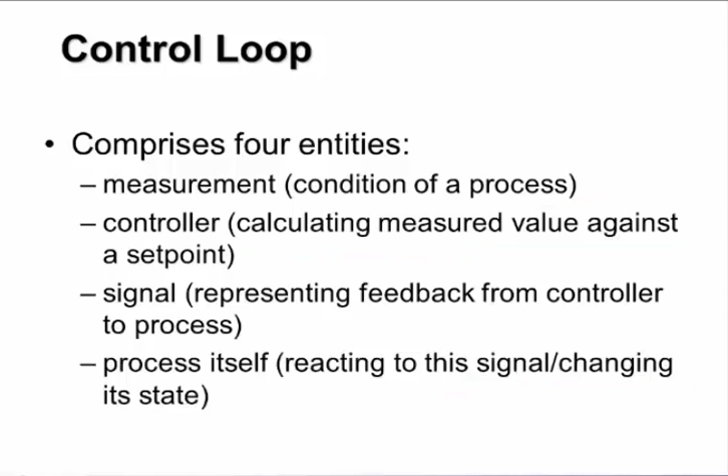The processes themselves can be actually described in various terms, and can also be defined as either a steady state model and a transient model, or an intermediate model. So what I mean by that is that the steady state model occurs over time on how the system will react over a long period of time.

Now, for a short period of time, really defined as the difference when a system actually changes its requirements. In other words, you change the set point or change the output, and the system has to react to it, and it's that reaction which refers to the dynamic response.

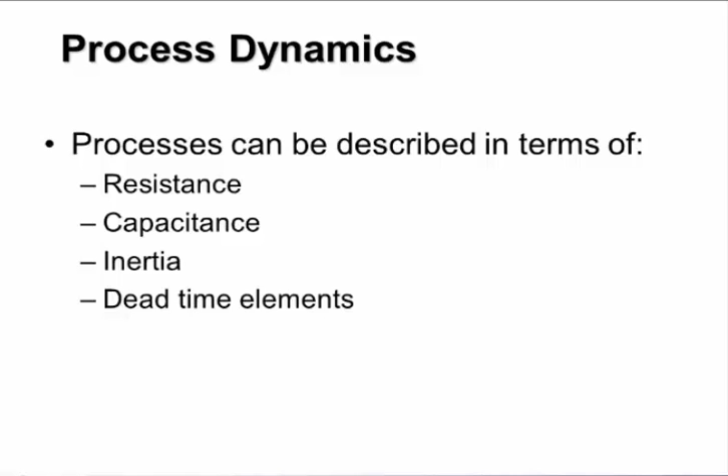Which then brings in the typical processes that you see here. So whether the system has purely resistive linear characteristics, whether it has a second order inductive or capacitive characteristic, if it has inertia, whether it be mechanical, thermal, chemical, or process inertia. There are also specific cases where dead time is a specific point that can be measured very clearly, but it points to a very specific case of delay in reaction based upon an impetus.

Okay, so for a resistive type of process, it's important to note that yes, there will be a response, and the characteristics that you see here is referred to as a step change. But what happens is that the process itself will eventually come up to speed, but it means that the system does have a very linear relationship from the change of output to the change of the process, and that is why it's referred to as a resistance.

In other words, for a small change of output, in other words small change of a valve, then you will get a change of the process, such as a flow system.

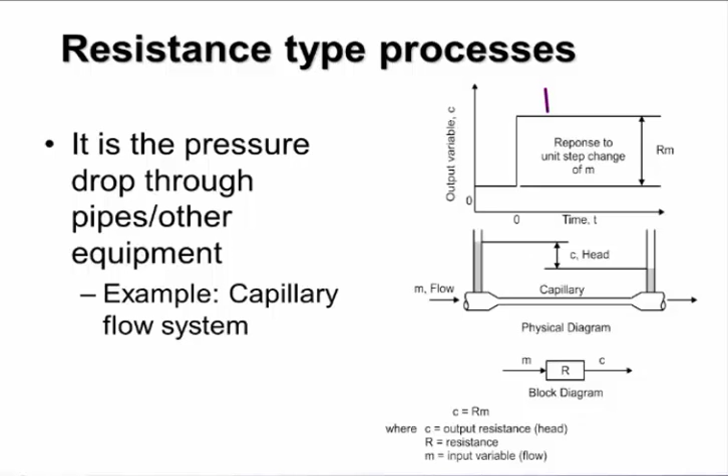Okay, so the capacitive type is where it has a characteristic of the loop that has some internal storage. So it has the ability to store the process, and at a set rate, or at a rate determined by the physical characteristics, respond to that process. But it isn't linear, and that's the characteristic.

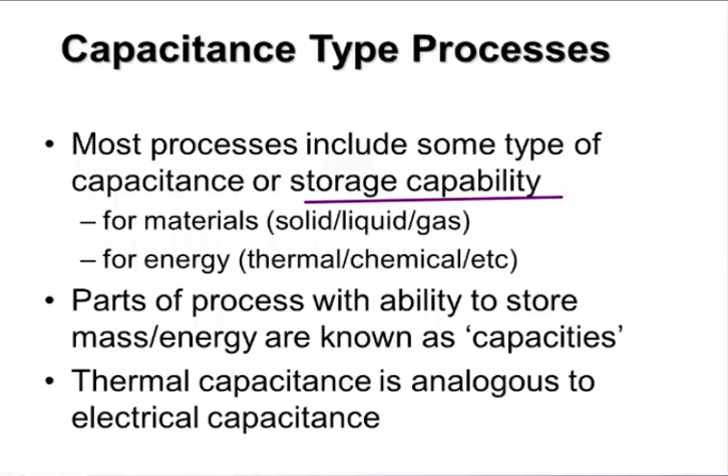So you see this particular type of aspect known through most of the typical processes that you will see around in process industries. Now, for the capacity or the capacitance to be effective, there is the ability to store the energy or store the material. And for storage of material, there are typical things of processes that include solids, liquids or gas, and or energy, which could be thermal energy, chemical energy, or process energy.

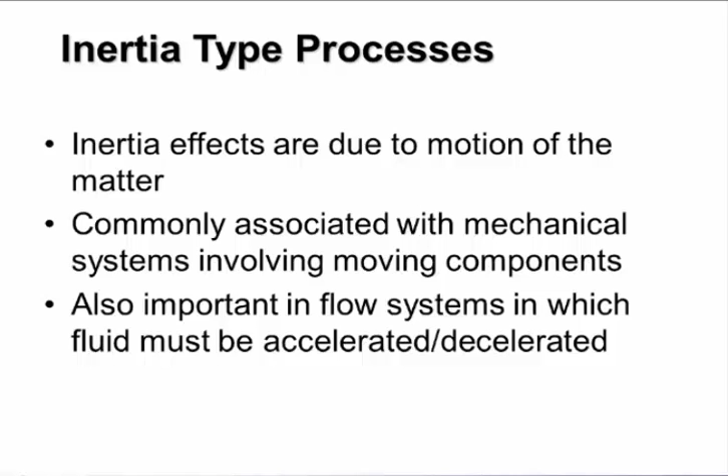So for the inertial type, there is a type of reaction between the impetus, in other words the stimulus, and the reaction, where you will get an inertial flow or inertial resistance initially, and then the system will actually be responding. So there is mathematical modeling of these types of processes, but they usually are around changing or moving of components. So it could be the position of a gantry robot, it could be the inertial movement of a valve, but anyway, there is a resistance to the movement there.

Okay, so of a first order process, a typical one is level control, of which you'll see that you do have flow going into a particular reservoir. The reservoir will directly vary its height, which is what you're trying to view, dependent upon the amount of material coming in. So there's a direct relationship - flow going in will cause an increase, a linear increase in the height. And that's assuming that the cross-sectional area of the process is uniform.

Now, it also has to be taken into account that the outfeed pipe will also affect the level, and it needs to be put into the equation or algorithm, that it also reduces the effect of the in-feed pipe. By saying that, you imply that the level will go down.

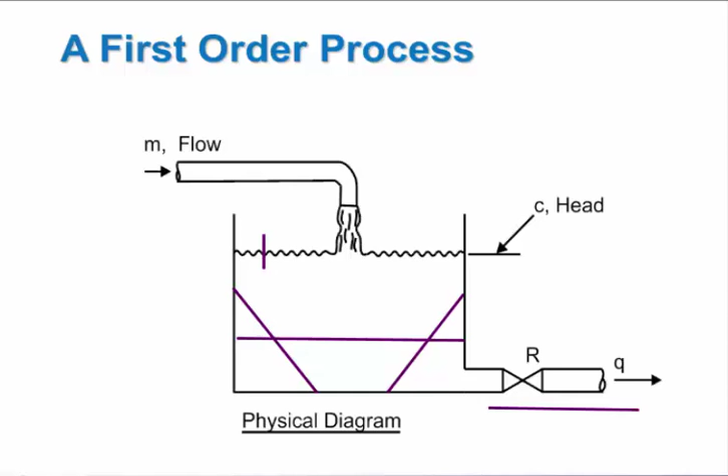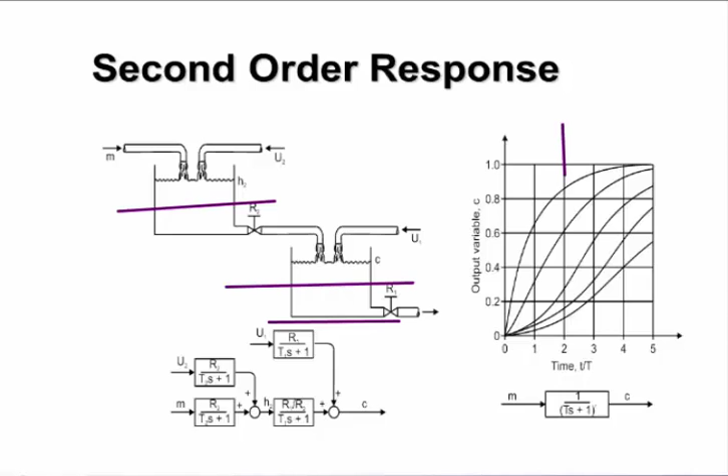So what occurs is that for optimal operations of your machine, you need to adjust the coefficients of your controller to your physical process, and that is referred to as tuning. One of the most prevalent controllers and control loops in industry is what is referred to as feedback.

Now, feedback is basically a system that will take the measurement of the process, as we mentioned before, and that is typically referred to as the PV, or process variable, that is fed into a controller, which calculates the difference between where it has to be, in other words, its set point, from the process variable, and then gives you a calculated value, which is referred to as the error.

That error then has an issue that needs to be resolved. In other words, the whole purpose is the error needs to be minimized, and then there are different coefficients within the system, which are there to make an algorithm very close to the mathematical estimation of the process.

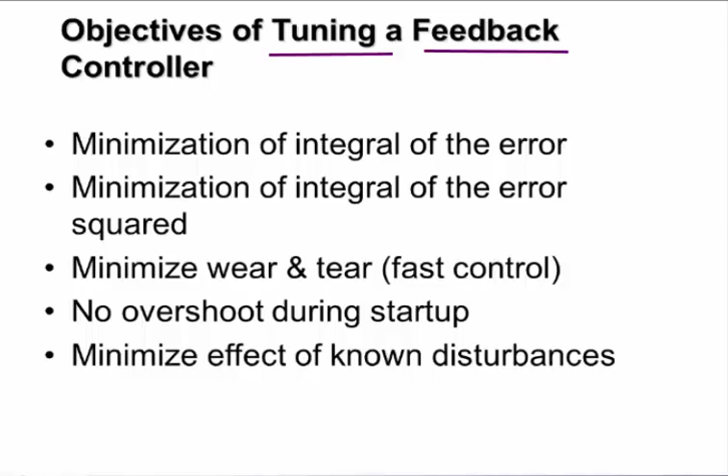So it could be that you have wastage getting up to the desired value, and hence there are various points such as trying to minimize the error of integration, and we'll talk about what that actually means when we look at the graphs.

So the error that you will see is based upon an oscilloscope or trend trace of two particular variables. One is the set point, shown in the dotted line, and the other is the process variable, which is the actual response. You can see here that the set point can change very cleanly and within minimal time.

With zero time, because it is just a virtual change. It's a parameter change. It could be a change in voltage, it could be a change in current, but it occurs without inertia, so immediately it has no physical limitations to it.

It goes straight up to its constant value. Now, what occurs is that drives the process change through the actuator, but it can't physically change immediately like that. So it has to go through a recognized response curve, and that's what we see in dark. The shaded areas are the differences between the two, and the idea of tuning the controller to the process is the minimization of those errors.

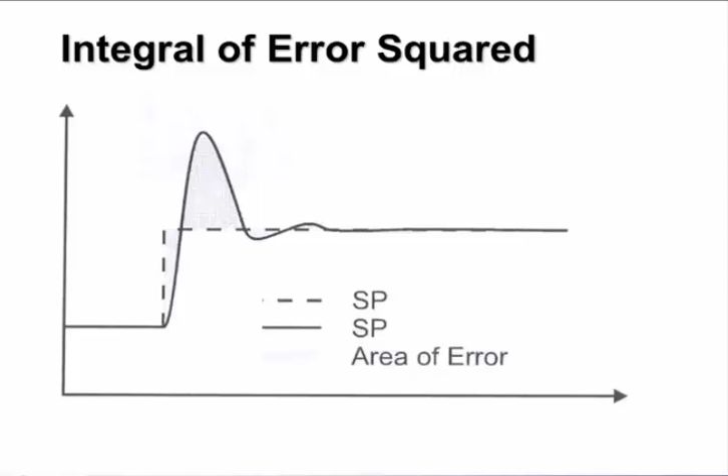So what are the typical types of controller outputs? There are two types of controller outputs. As we mentioned, there would be an error, so we have to change the process somehow, and there are two classical methods on how to change the process. You either put a control that will either fully turn on a variable or fully turn off a variable, and that is referred to as on-off control.

And the variations in the process to that may, depending upon their inertial characteristics, smooth out that modulated wave, that on-off waveform. In other words, referred to as a pulse waveform, and give you a response.

The other type is one that will continually vary the output, which is referred to as modulating control. There are two different types, so what do they actually mean?

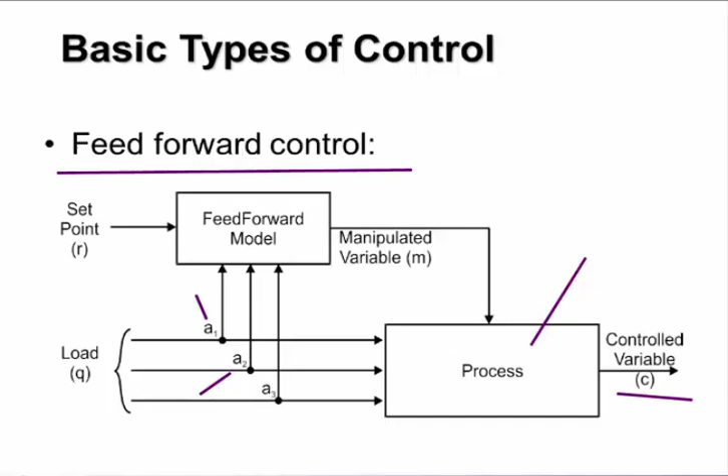So that's the process. It predicts what will go on based upon some very complex and also very sophisticated algorithms. Now, the accuracy of this type of control heavily depends on the accuracy of the model plus the measurement of the variables coming in.

So the other type of system is referred to as the closed loop model, or also referred to as the feedback model. That is the type of process that we've described many times, and is also quite common in most industries, where the process is actually being measured through a measurement device.

So its effect is actually being measured, and hence, if the effect is different to its set point, it makes the controller react and change an output, which will then change the process. So whereas feed forward predicts, feedback reacts.

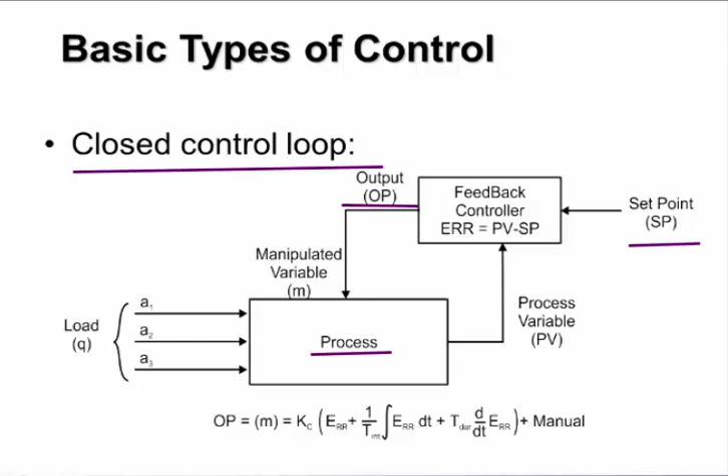And yes, it does have a set of equations or a model that it needs to understand about the process to be able to react effectively, but that is a different set of equations and models compared to the feed forward, because you are firstly changing different timings, but also looking at different inputs. So what are the models within the closed feedback loop?

Well, the three classical algorithms being used are what is referred to as proportional, integral, and derivative control. So what does that mean? The proportional control allows the system to know how over steady state time it will react. In other words, if you place an output, then you know for a certain ratio, referred to as the proportional gain, how the output will respond.

In an integral control, what it says is, okay, if the desired value is never reached, in other words, the error is never zero, then we need to reevaluate it. And that's where the integral control comes in. And the derivative says if the output is changing too much, which causes a response in the process variable too quick, then you have to dampen it down, and that's where the derivative value is in there.

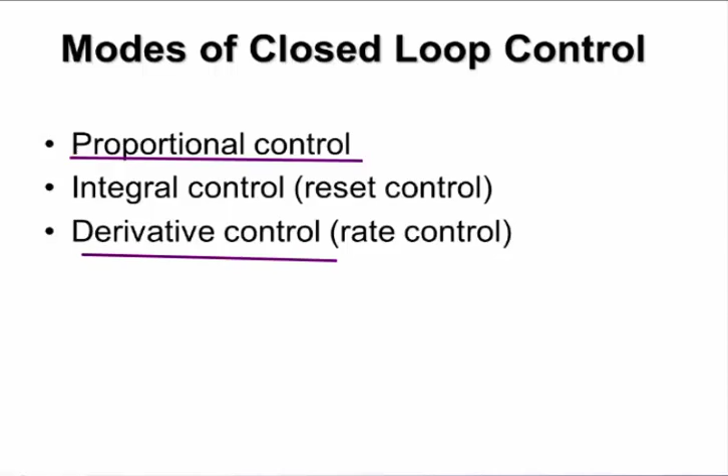So you may have heard of PID, and that's exactly what we are doing. It works off a black box reactive model, and that's what most processes are suited to. Okay. So they can work independently or in combination, but the idea is that you need at least proportional change to take the steady state value to the correct value. And you can also throw a combination of integral and derivative into the particular system,

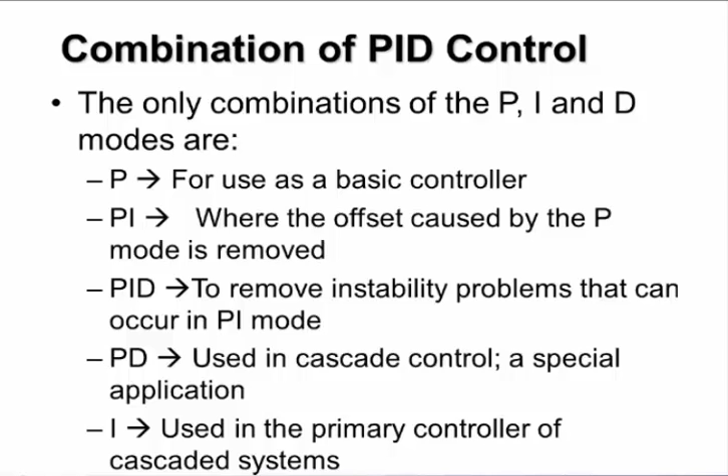but the proportional is always required. Okay, so either way we'll need to look at the steady state response plus some of the dynamic characteristics as well. The feedback controllers are the ones that are most common in most industries. And if we take a mathematical model, in other words a block model of it, you'll notice that they can be described in terms of inputs and outputs.

Okay, so the idea is that the different systems are able to take in the changes of the values and then put the output to change that point. So you have the set point, which is usually coming from another piece of equipment, a SCADA system, a PLC, etc., even a local operator control. It then measures the value. In other words, it becomes an input, which is referred to as YT, but it's also commonly referred to as the PV, process variable. And it has an output which changes the actuator, the variable speed drive, etc.,

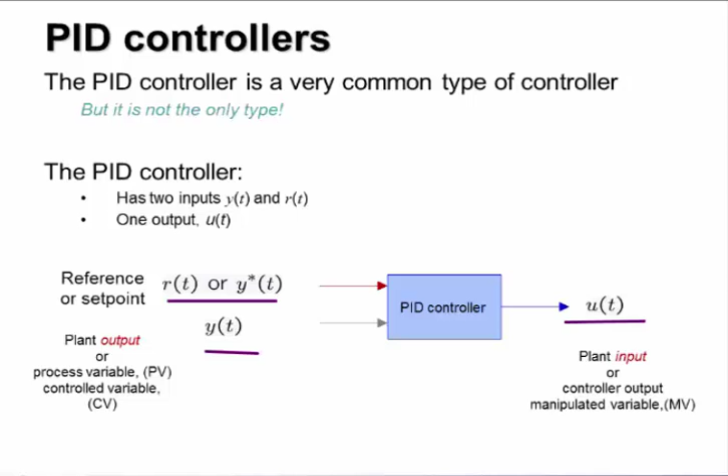and that is referred to as the MV. Okay, so it can also be described as a continuous loop, and whether you start to talk through from the set point, from the process variable, or even from the manipulated variable, it doesn't matter, because you have to go through that one complete loop to actually get back to that point.

Now, one of the issues that you need to be always aware of is that this emulates and uses the black box model of a process, and it's important to always keep that process in mind. So, for instance, at the summation point, which is the difference between the set point and the process variable, it has to be in terms of the units of the process. In other words, the flow, the temperature, the position, the weight, whatever that is. Okay, process-centric is another way of saying it.

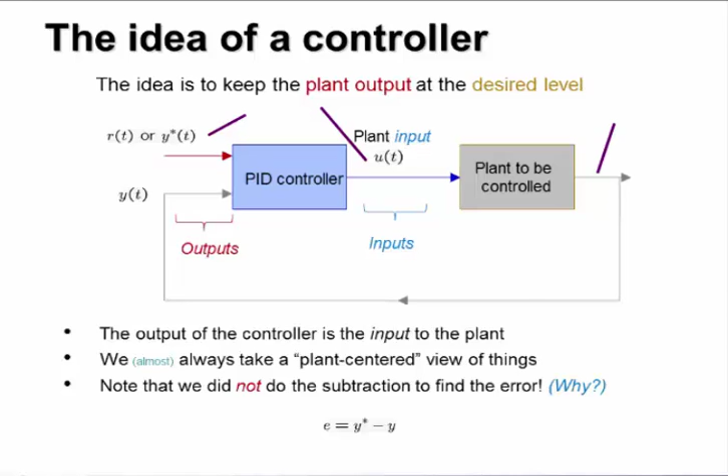So in the control loop, that particular model that we mentioned earlier relies heavily on a good clean response between the process variable and the set point. It has to be linear, stable, without time delay. So that's the ideal case, and I can say in about 85% of the cases around the world that actually is true. However, in some cases that isn't true.

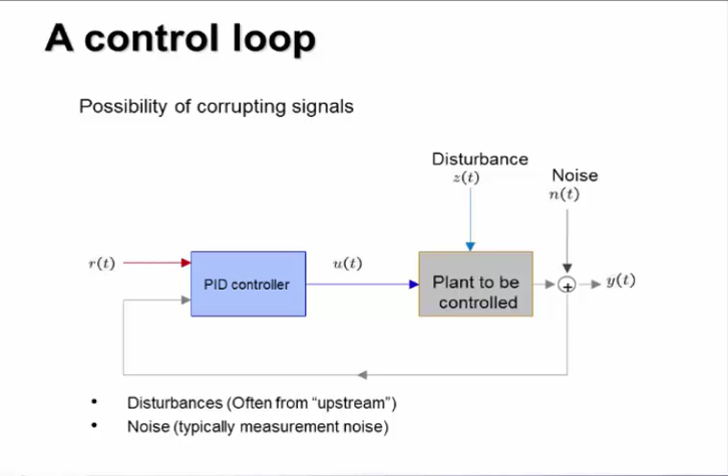For instance, you may see that there is some distortion in the signal from the sensor, or there could be some interference or disturbance to the actual process that disrupts that linear relationship. And that noise can be of two types, and we'll go through that in a future one. But the controller will try to react to that noise. So whether that noise is real or is just an apparition based upon the electrical signal, etc., that's what we have to determine.

So I mentioned earlier that the PID has three terms: proportional, integral, and derivative. There are various ways to describe it. The system has an instantaneous error, so it gives you the steady state response. If there's an error, then you have to increase the output. That's the proportional term. The integral term looks at what the actual error is over time. And if it's sustained over time, then the whole process needs to be reevaluated.

So the derivative basically says, are we actually correcting the value instead of just escalating the value? What that means is that if it is going in the correct direction, trying to minimize the error, then that is working on the derivative. Or what you tend to do is increase its value so it will actually go towards that.

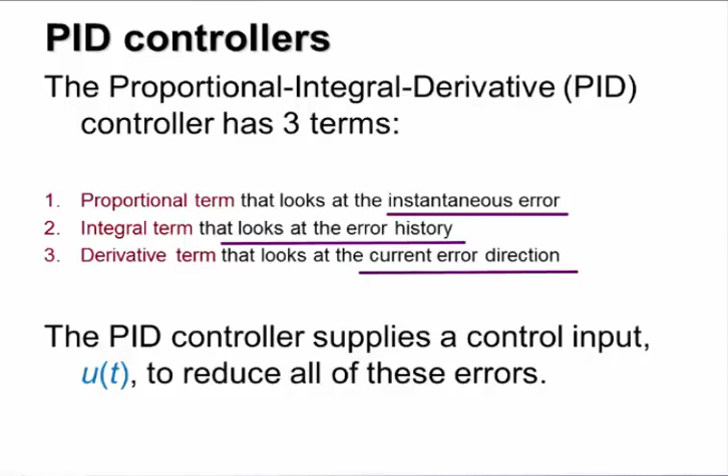Okay. So there are various variations of PID controllers, and that is mainly because there could be non-ideal types of processes. In other words, the process itself may not really suit the algorithm that you've set for it, and you need to have variations of the algorithm.

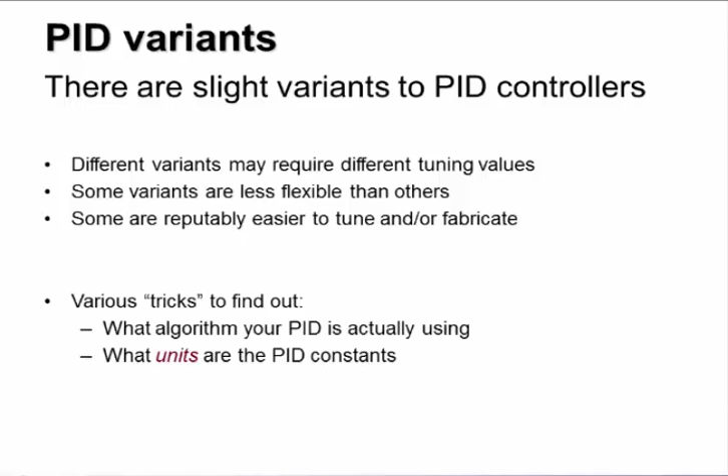You shouldn't have to change the process, but the controller then needs to be looked at, on how its algorithm will actually need to be modified to suit the actual process. Okay, so the most classical way is that you then separate the type of algorithm that is placed within the controller.

And the most useful one, or what is referred to as the ideal, is where there isn't any timing discrepancy between the proportional, integral, and derivative control. In other words, they are all active at the same time, and the three of those have equal effect, equal timed effect, on the output change. Okay. Now remember, all you're doing is changing one output. You're changing one actuator. You're changing the variable speed drive. So how we're actually changing its signal really depends upon the combination of these three things.

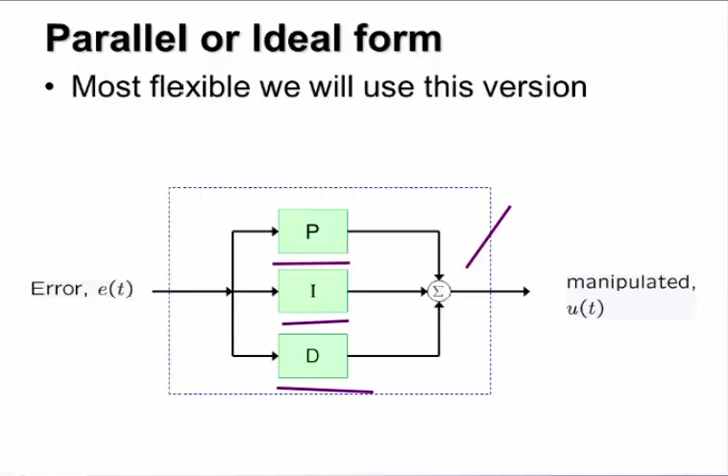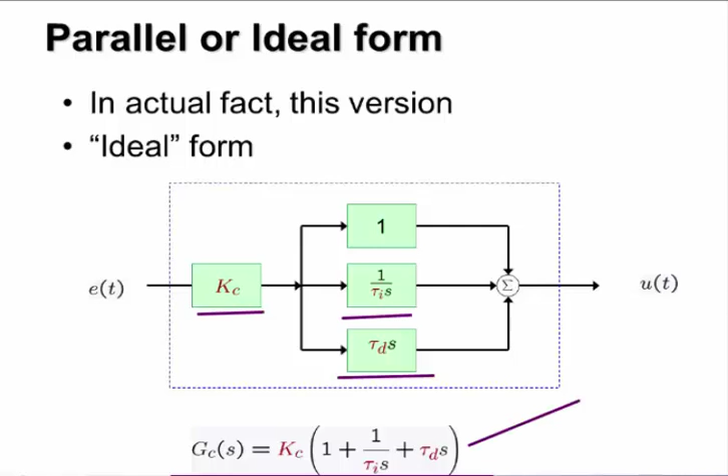So in an ideal form, with good linear relationships, you tend to have them all working at the same time. And those are the equations that you will see, with the proportional gain, and then the integral reset time and the derivative time as well. And that comes up with the final equation, which has to be solved by your controller. Okay.

However, in systems that do have a time delay or don't actually have a good interrelationship between the inputs and outputs, you need to have a slightly different model. So another type of model, which again uses PID, but the derivative control is actually worked on first, and then the proportional and integral control is put through the algorithm. So we set with a greater weight how the derivative, in other words, is it actually going in the right direction first?

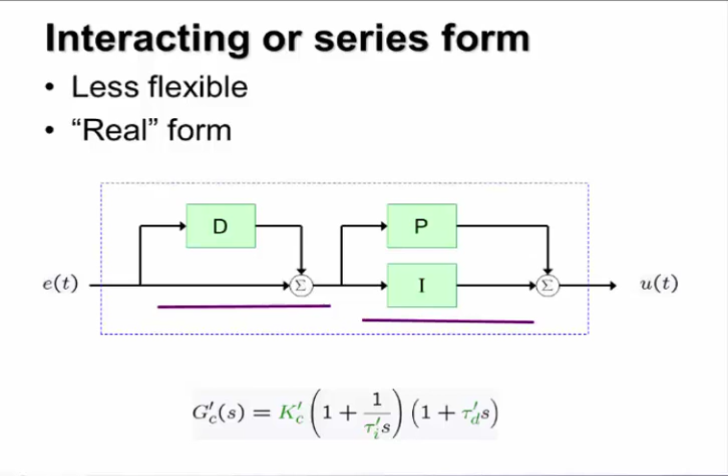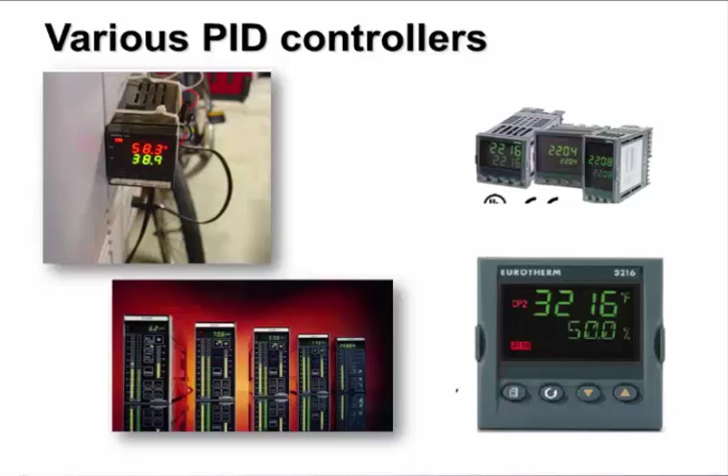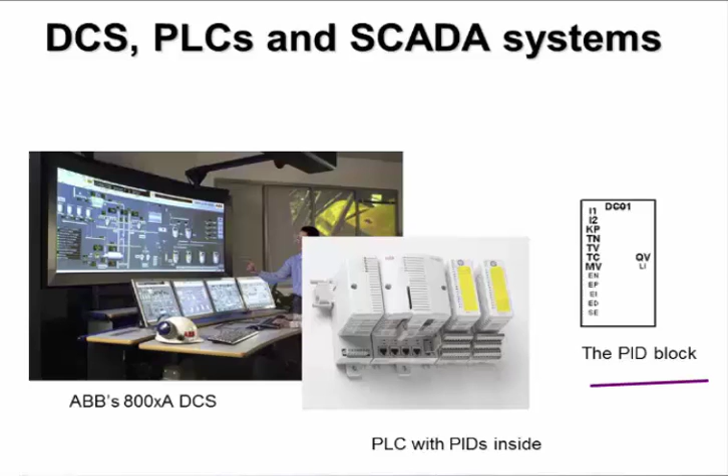Okay, so there are many different types of controllers available on the market, including standalone controllers, pluggable controllers, DCS systems, PLCs, and whether you employ the control loops within computing, within PLCs, or even purely in software, you have to be very careful of the reaction times. Both the reaction times of your machinery and your loops as well. Some of them also allow it to be in software and PLCs.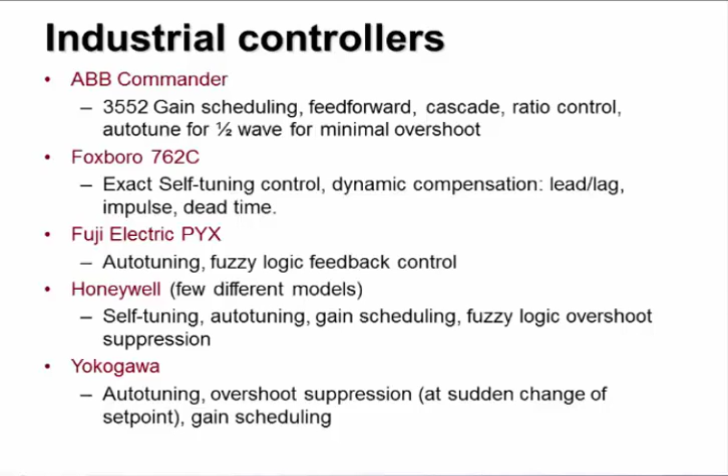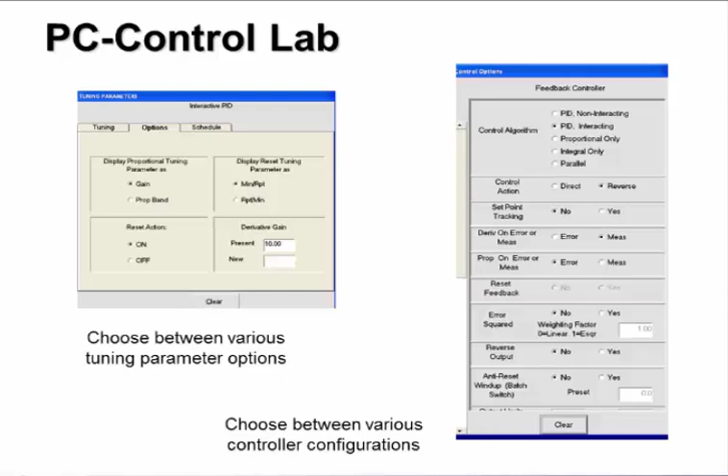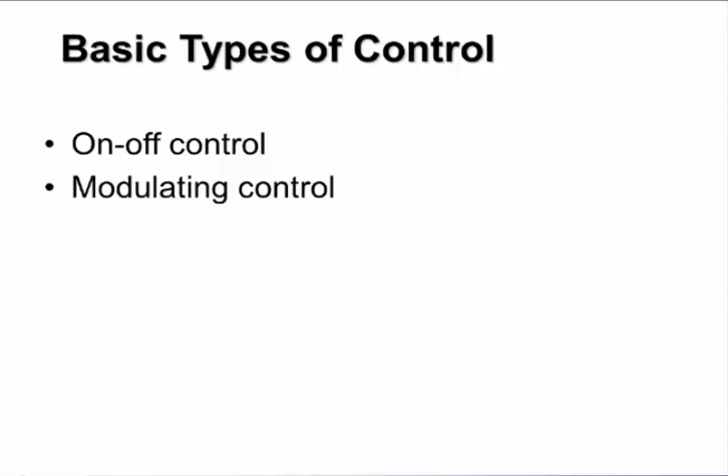Now, what are some of the tools that you need to set the different modes? As I mentioned, there are two types of controllers, on-off or modulating control. And as mentioned earlier, your process may be suitable to tolerate allowing the inertial point of the process to go through and really be able to affect the average temperature.

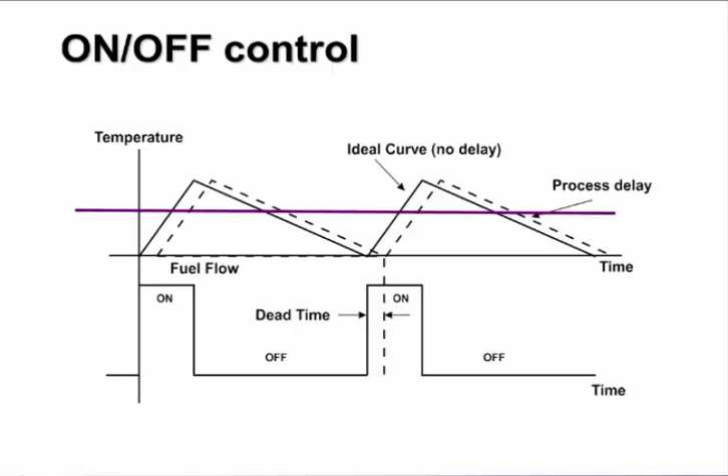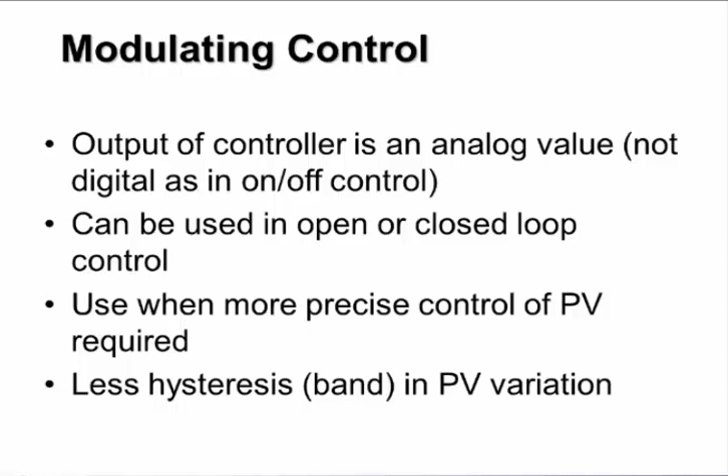So this may be suitable for a lot of different processes, temperature being one of the best ones, because it doesn't really change the conditions of the machine if the process isn't able to modulate, and that's what we have here. Okay, so when we are modulating, we need to make sure that you have more than just that basic control.

Okay. Regarding what can actually go wrong in a process to make the tuning either not optimal or to be made iterative to be more conducive to the real process. So what we'll talk about first is what is referred to as disturbances, and then offsets.

Now, the disturbances that are classically put into a particular either closed loop or open loop feedback system are the ones that are generally not directly related to the two parameters of the set point and the output, but do affect either the stability, the ratio of the output compared to the actual process variable, and also the timing aspects. So they are the definition of what is referred to as disturbances.

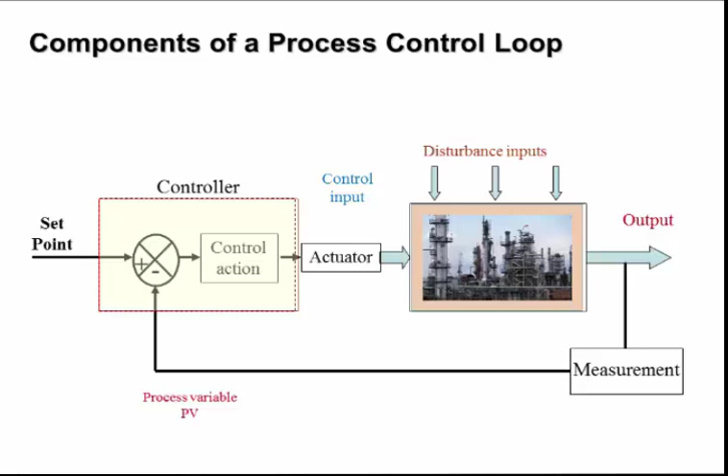But the idea is that the process is what we are trying to control, and it generally is only one or maybe two parameters, and the variation of that particular parameter is via usually one or two particular outputs, but it is how those outputs don't effectively control the process variable through the interference of other parameters which are classified and grouped as inputs, disturbances.

So let's have a look at what we mean by that in, say, a feed-forward situation, or even just a normal process. This process actually has as its output a temperature which needs to be controlled, and that is because the next stage of machine will have to have a fairly constant temperature as its input. Okay, so that's the thing.

So if we have a look at the process, we note that there is a direct line of fluid through the inlet, through a heating chamber, and then through the output. So as far as the direct relationship of the control, we are able to put in heat energy that then goes into the heating chamber, which heats up the liquid, which then gives you a corresponding temperature. Okay, so the mechanics seem to be fairly clear.

However, what the disturbances will do. And it should be noted that when you try to describe this, you need to be able to describe your process first. So your first process is, if I increase my fuel, I will get an increase in temperature. That's basically the basic premise.

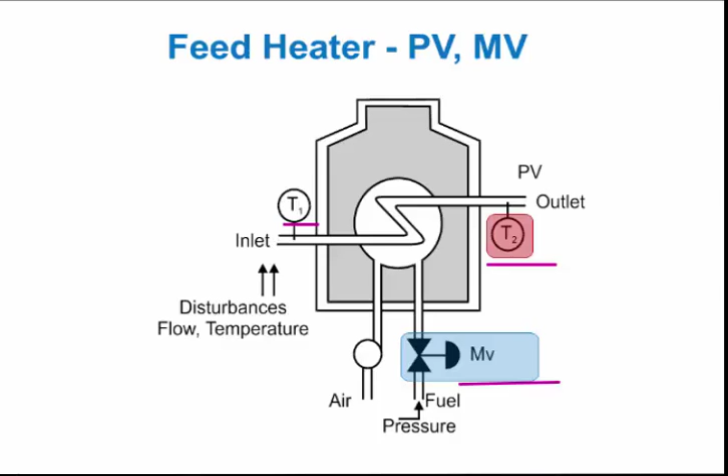So hence those two disturbances directly affect the efficiency of the fuel going in. So hence you need to be able to adjust for that. So that's the basic concept of disturbances. Okay, so what could go wrong? As I said, the fuel pressure varies, the inlet water temperature varies, and the water flow.

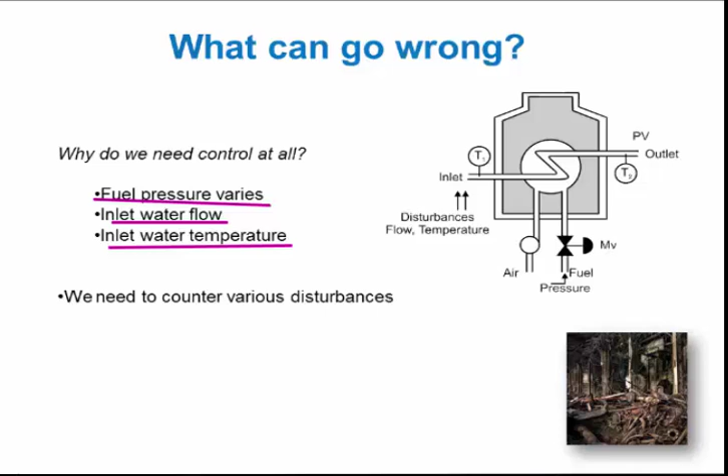Now, I did deliberately omit one, and it is the air that goes into the system, and that is because the air, which is essential to the fire triangle of oxygen, fuel, and ignition, will definitely decrease the thermal capacity of the furnace if you don't have enough oxygen there to actually burn the fuel, and hence you may have oversupplying of the fuel, which could actually create an inefficient thing. So that's how the various points are.

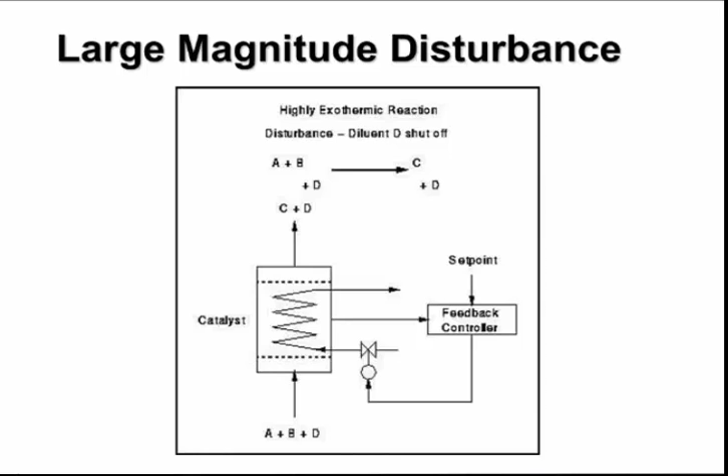Okay, so when we look at those in a slightly different method, we note that the system itself can also have rather large disturbances, and the understanding of a large disturbance comes down to its mathematical model. Okay, so it's all based upon what direct influence the actual disturbance has over the output or the controlling point.

Okay, so now one of the other systems that we need to have a look at is how each of the different events need to be looked at in terms of what the response of the controller is.

Okay, so one of the key things is proportional control out of the PID. So what we know is that as the proportional control tends to increase, then the gain, the actual response of the output, tends to increase. However, there could be slight disturbances, as I mentioned earlier, and it could be things like wastage or slightly incorrect values or based upon the ability for the system to actually resolve down small enough. And those type of things can lead to what is referred to as an offset.

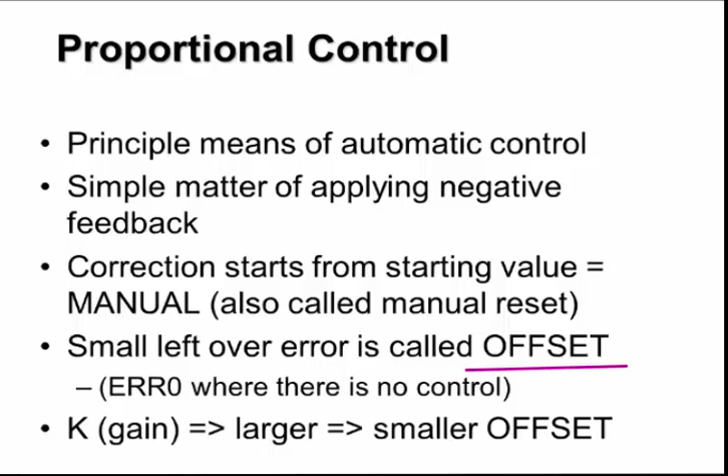So the offset is basically the difference between where the set point is and where the process variable is. So that's one of the other disturbances or inaccuracies that could occur when you're tuning, or when you're doing your process. So what could occur is as we increase the amount of proportional gain, remember the proportional gain will tell you what is the correct rate of the steady state output. Okay, so the higher the proportional gain, the closer it will be to the set point.

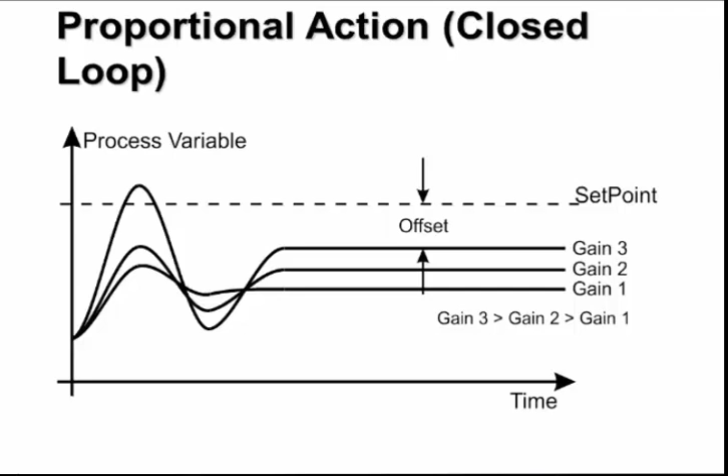Okay, but the idea is that it also may increase the instability of the system, purely by increasing the controller's estimate of what the gain is. Remember, the gain is always the difference between the output compared to the change of the process variable. So the change of output to the change of process variable. So if we're driving the output harder, then the process variable may react to it. Okay, and hence you go into the different equations that you see here, different graphs.

Now, one of the other ways to reduce that error is to reevaluate the process at a regular interval, and that is referred to as the integral action. Okay, and it has an integration time, which then allows you to add up all the errors based upon the difference between the set point and the process variable. And if it is too much, in other words, above acceptable limits, what it will tend to do is increase the action of the output, and hence try to drag it towards the acceptable limit. In other words, it tries to reduce the offset even further. Okay, and that's the integral action.

Okay, now it does require both proportional and integral action to be added. It can't just be integral because it needs to reevaluate the new base point, and then the proportional value will start to move it closer, whereas the integral value will then try to reevaluate it. So you're continually looking at the integration time and then putting the proportional part up again.

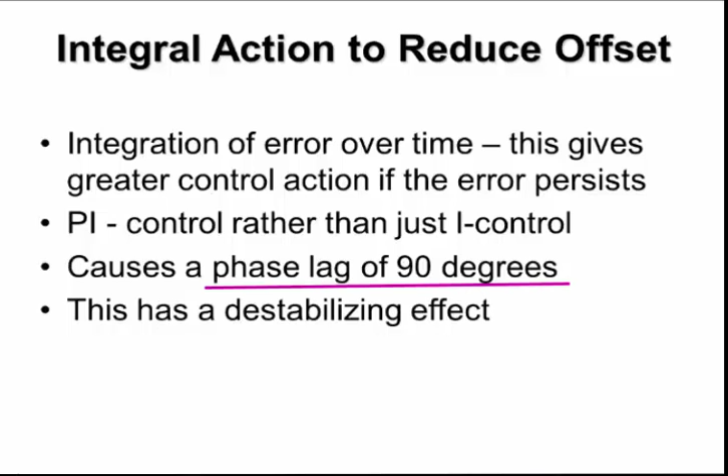Okay. Now, what it does in some instances is that it may cause a lag of 90 degrees. And what that means is that the output would always try to be responsive to a change in the process variable. So the process variable will be behind. In other words, it's at its minimum value. And then the output will be reevaluated, and it will hence try to go to its maximum again, and that will cause what is referred to as a phase lag when we look at the different traces.

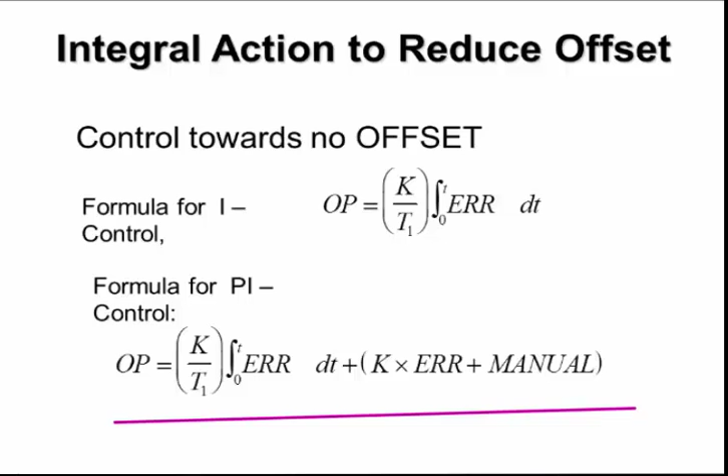Okay, now the formula based upon that is what you see here, but it's basically that you are trying to do the reevaluation of the equations of the error, and if that error is too much over time, then the output will be adjusted accordingly. Okay, so the typical process is what you see here. The system will look at the level coming in, so the level of the tank, based on an input and an output.

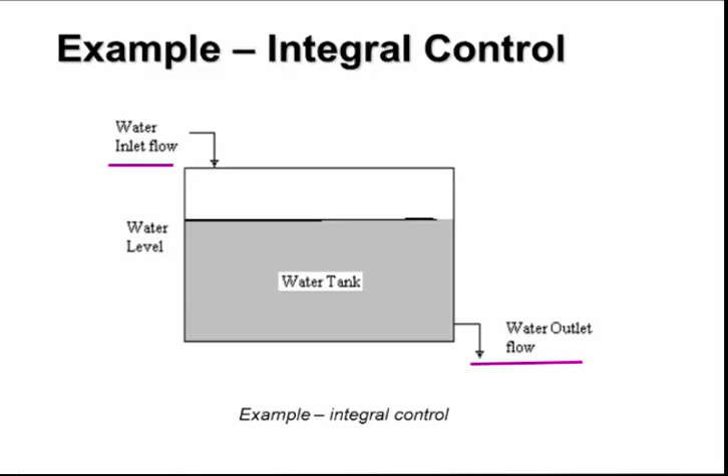Now it could either be high or low depending upon the magnitude of the severity, but also the process may become a little bit more dynamic, and that could actually create instability if the integral period is too short. In other words, it's trying to reevaluate it even whilst it's still settling, and then it becomes an issue of stability.

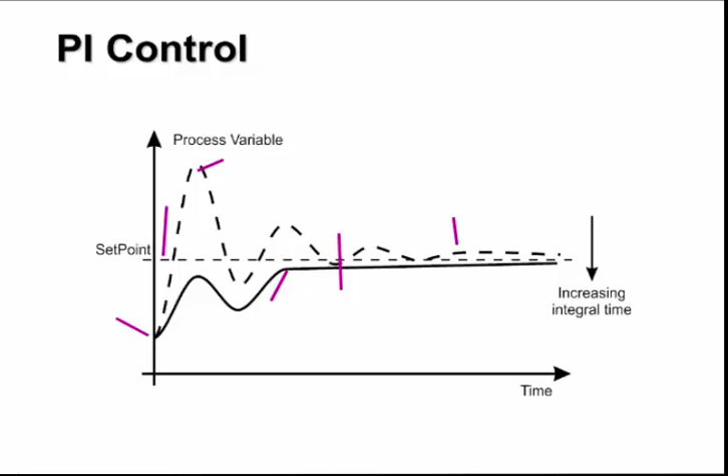Okay, so when we go through the other parts that could go wrong, we tend to look at the long-term issues, and we have a toss-up between the long-term and the short-term issues. The short-term issues of speed, in other words, reaction, and the long-term issues of stability or steady-state control. Okay, so what could cause instability?

As I mentioned before, you may have small changes in disturbance, and it could be that it's too much integral action, or not enough derivative action. Too much integral action means that it is reevaluating it too quick. In other words, the integral time is actually too small. So that's one of the causes of instability. Or where the majority of the instability occurs is that the process has a nonlinear or a time-dominant effect, and hence is inherently unstable.

So stability criteria has been used to quantify this effect, and it basically says that if you have an oscillation, which remember is based upon the controller's misinterpretation of the real response, you may have the controller and its output trying to continually respond in almost like a chasing method, where you have the output oscillating compared to the process variable,

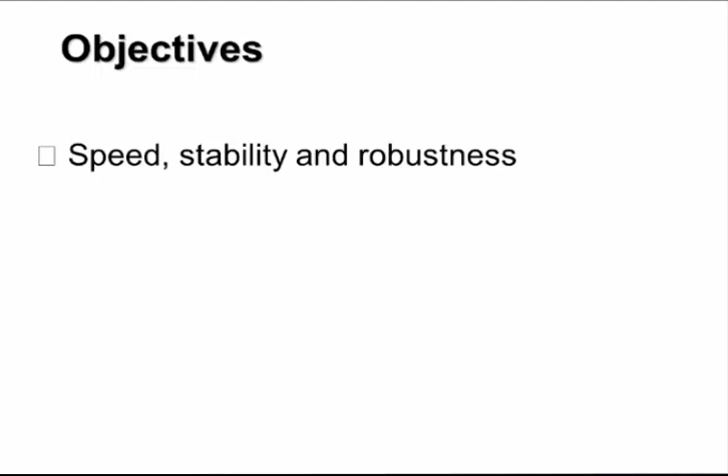As we mentioned earlier, the causes of instability tend to be whether you have incorrect alignment, incorrect actions, and also if you have a disturbance that could be an issue regarding the dead time, the gain, or the actual control.

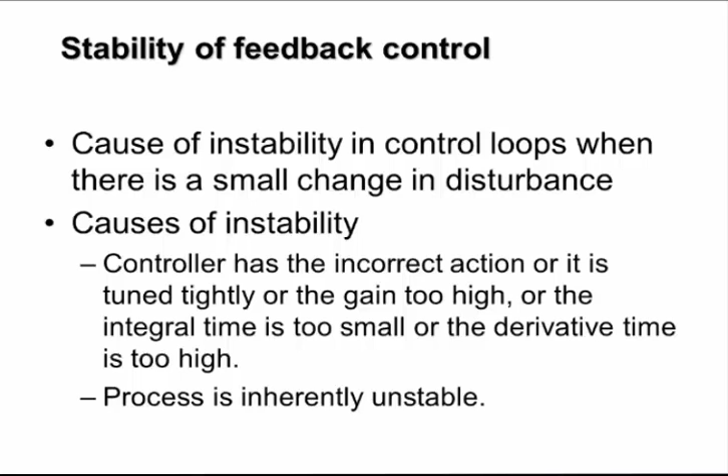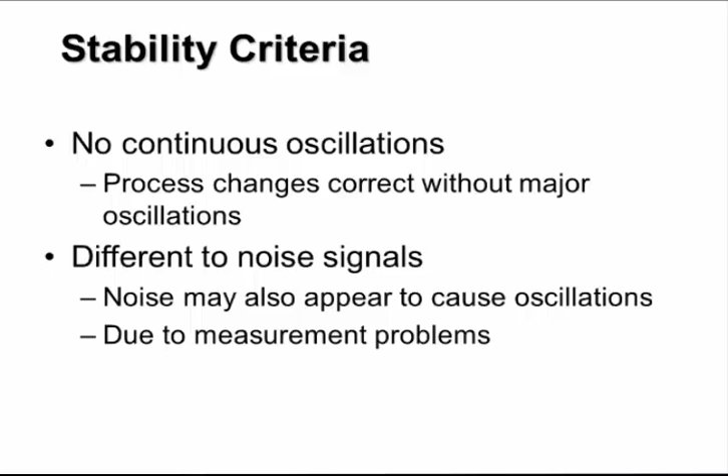So I mentioned before that the stability control is dependent upon how the oscillations actually affect the process, and hence whether there is the ability to oscillate. But that is an undesirable aspect for most particular systems, where you tend to have the need to reduce the system to make sure it has a reduction of oscillation, and hence get to the final value as quick as it can.

We also mentioned some issues regarding the mathematical criteria, and how it actually shifts from the process variables to the control variable and the output, and see how that reacts. In other words, it's the controller trying to chase the process, which if diametrically opposed to the values coming into them, then they tend to have a shifting of the frequency.

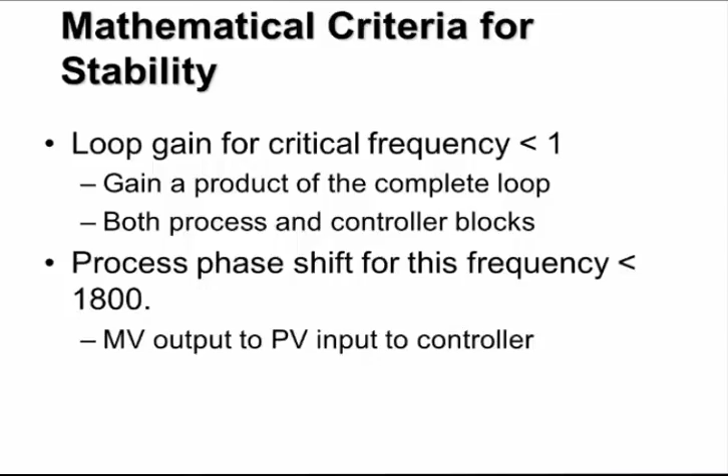So we mentioned that if the standardized gains were less than 1, then you would have a signal decay. In other words, if it's oscillating, it would mean that the output was actually allowing the process variable to settle down over time.

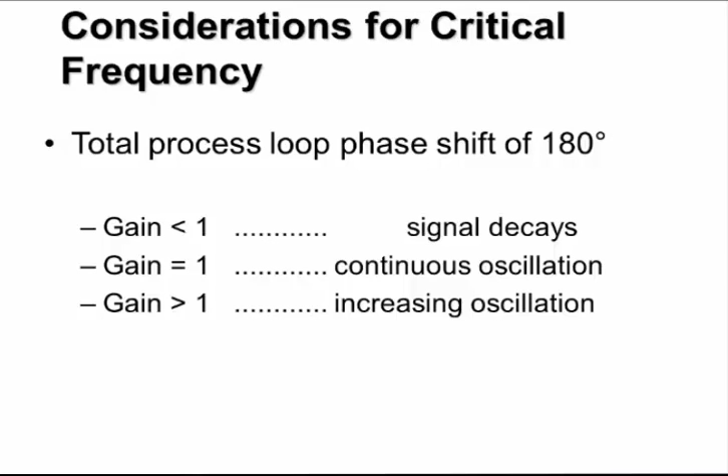If the gain was 1, then the output would react in such a manner to contain or maintain the oscillation. Where if the gain was greater than 1, then the output would tend to further the oscillation. In fact, it would be increasing in magnitude.

Okay, so now why does all that occur? And the whole point is that each of the parameters in a black box model of a process can really come down to 3 things, and that is the gain, the dead time, and the time constants. So when we have a look at the model, we would think of it in terms of a change of input or a change to the actual process.

Now, it could be a valve, it could be a variable speed drive, it could be any type of control input that will try to change the process under what it thinks are controlled conditions. Now, yes, it will create an outcome, so you will have a proportional change to the input of the process, and it will then give you an output dependent upon the black box relationship between the input and output.

Now, as we mentioned earlier, the input and output do have a fixed relationship, and it could be quite as simple as a linear relationship — percentage in gives you percentage out — or it could be as complex as a multivariate model, which includes time delays, nonlinearities, and various other nonlinear processes.

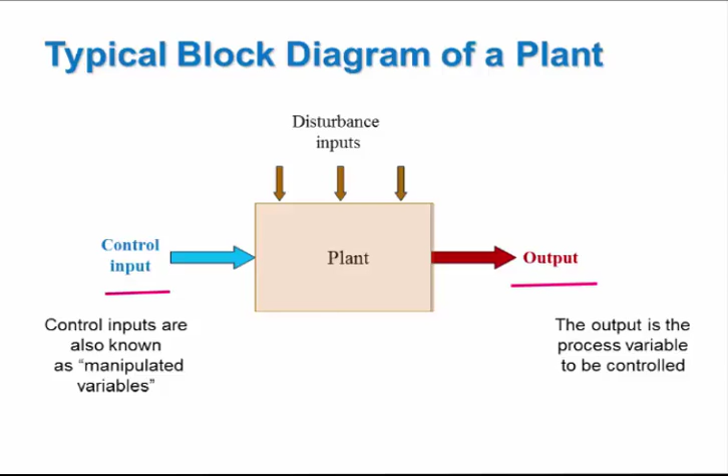And that could include, from the previous point, the feed flow in, or the temperature of the particular point. Okay, so let's go through some of the relationships and determine some of the nomenclature.

The first point is what is required of the process, and that is referred to as the set point. Now, the set point itself could be looked at in terms of whether it has a value which is set by an external system, such as a DCS system or a PLC system or another unit.

The set point then is the desired value for which the parameter, which is the actual parameter, is set. The manipulated parameter is the value or the point by which the system actually has to change the value.

It's the percentage change of the actuator, and it could include the change of a valve, the change of a variable speed drive, or various other points. But it's the change of the input to the process. The other part is the other disturbances which upset, or can change or influence, the relationship between the manipulated parameter.

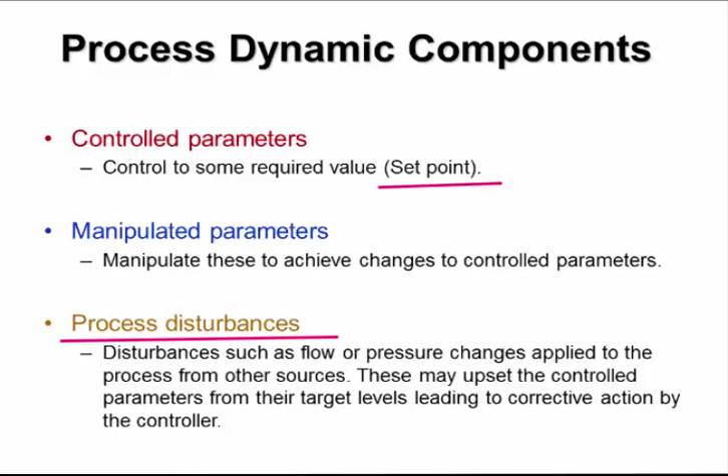So now we mentioned that there is a direct relationship, or a mathematical relationship, between the process variable and its input to the process, in other words, what we refer to as the manipulated variable or the output of the actuator. And it has a black box relationship.

That black box relationship is actually defined in three parameters: what is referred to as the process gain, in other words, the ratio between how much input you would need to put in to get a determined output, or the sensitivity; the response from the time that you actually change the input to a reflective output, and the delay of that particular point, so there is a lag or response; and also the lag time or lead time, or the response time, would be how long the system will finally get to its final value, in other words, its settling time or response time.

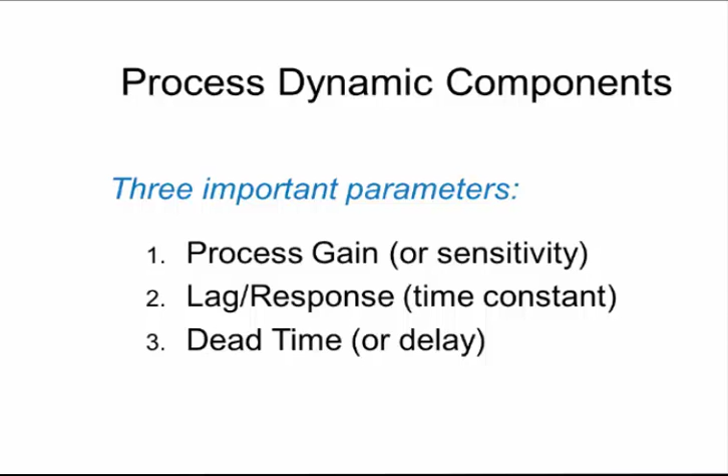But there is also another parameter, which is determined or can be viewed by its graph, of the time before anything occurs in the background. So that basically is saying that the settling time to get to its final destination is the response and the lag time. However, the time before it actually gives you any change is the dead time.

We also said that the process gain is equal to the ratio of the process variable compared to the manipulated variable. That's quite a well-known issue. So when we look at that particular value, the value of that will determine if the actual part that is put into, say for instance, a controller, is either overestimating the physical process or underestimating the physical process.

Then we actually look at the loop stability. So what does that mean? Well, we already know that the mathematical constants within a controller may or may not reflect the dynamic or the steady state conditions of the actual process. In other words, the process itself may be overestimated in its calculations in the controller, or underestimated.

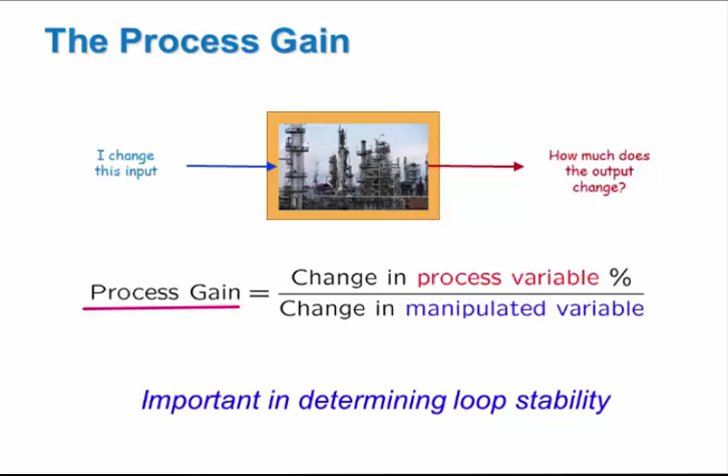So hence you may put the controller expecting a certain rate of response. If it doesn't get that rate of response, then it will try to increase its output until it gets that rate of response. And hence, if it does so, it could create an overshoot as far as the output is concerned, and hence we have the instability occurring.

Okay, so that's the points. Now another point that I wish to go through is the response time and the dead time. Now the response time, which we'll go into in further detail, is the rise time of the actual process until it comes up to the steady state, and the dead time is, as I mentioned earlier, the time by which, if you were tracing the set point and graphing it against the response, the process variable, it was the time that it would actually start to give a useful value.

Now, another term that is also important to the stability and also the accuracy of any loop is what is referred to as the process noise. Now, the process noise is defined by two particular aspects. And the process noise is really a deviation from the pure signal that is coming from the actual process.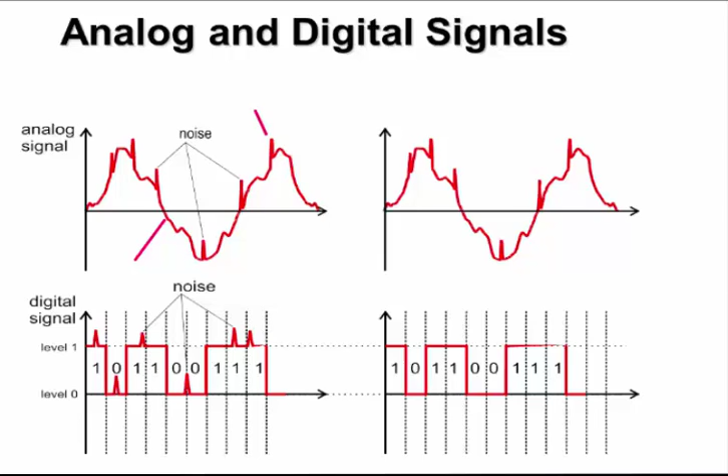So one of the techniques that is prevalent is to try to reduce the amount of that noise, and to get a good visual indication of the type of signal that comes into it, there are many different tools that you can use.

One of the most useful tools, especially in field checking, is an oscilloscope, and the oscilloscope does actually give you a good waveform check of the particular system. This is a cathode ray oscilloscope. These have been superseded by liquid crystal displays, but they give you the same type of trace. In other words, they actually look at one signal, say for instance a DC voltage, compared to a voltage that's coming out of a sensor.

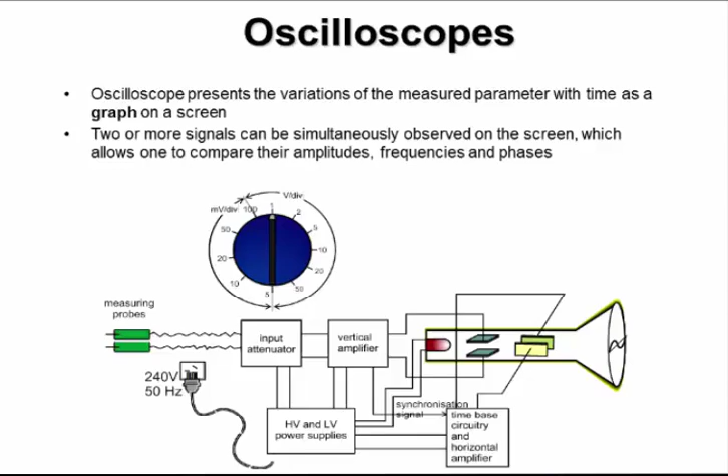So a few ways to actually reduce the effect of noise is firstly through filtering, either using an electronic conversion into the digital realm, in other words conversion from an analog into a digital signal, and then doing noise filtering based upon frequencies, or you could actually use an analog frequency suppression.

Which is obviously what a filter is, and there are various types of filters that will give you different types of signals which minimize the actual induced non-process related noise. So you have something like a PV filter.

So now you can have noise filters which filter out the actual noise, and they tend to be ones that have a fairly low threshold frequency. So typically they are a low pass filter, and that's where you tend to have fairly low smoothing objects or low smoothing things. But obviously that has to be looked at in terms of what your process is, because you don't want the filter to actually reduce the effectiveness of the actual controller, so there has to be some point there.

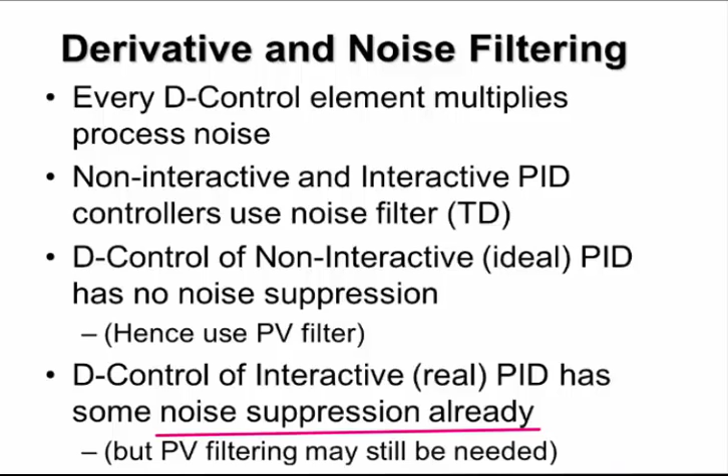There are ones that will actually give you a high frequency filter, so what they tend to do is isolate the frequency that is the noise itself, and then, through noise suppression, invert that back into the signal as an antiphase or an inversion, which then cancels out the noise and leaves you with a lot cleaner signal. So that's filtering, one of those issues to make sure that the stability and the accuracy of the signal going into the controller mimics or is analogous to the actual process.

Now there are many different types of noise, as I mentioned before, and they could include the actual process or the measurements, which includes the electronics, the cabling, etc. So each one of those needs to have a specific type of filter.

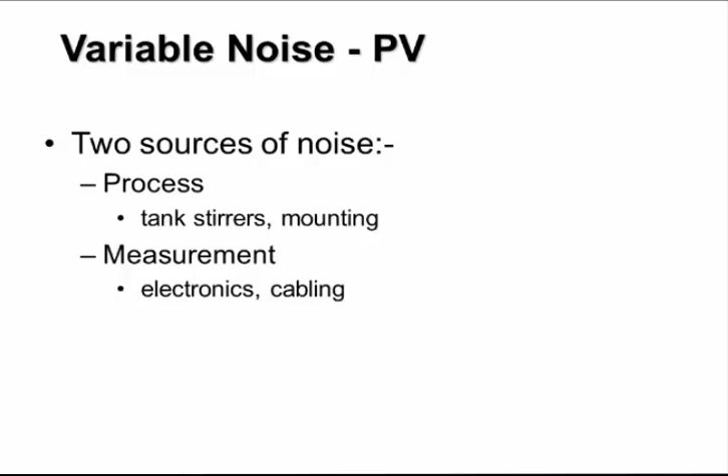So when we have a look at the filtering of the actual value, the idea is that we need to make sure that whatever we put in to suppress erratic points of the signal, we have to make sure that it does suit the process.

Firstly, we have to identify the actual noise, and as I mentioned earlier, there are various sources of noise. But if we look back into classical control theory, then the electrical noises are based around three concepts: one is emitted radiation, one is conducted radiation, and the other is electromagnetic induction. So you have electrostatic induction or electrostatic coupling, and electromagnetic induction or inductive interference.

So each one of those will give you a source of distortion, and they need to be looked at because they will create instability to the process, giving the controller the need to react to a much higher frequency and also a different magnitude than the actual process. In other words, it creates an error based upon the noise.